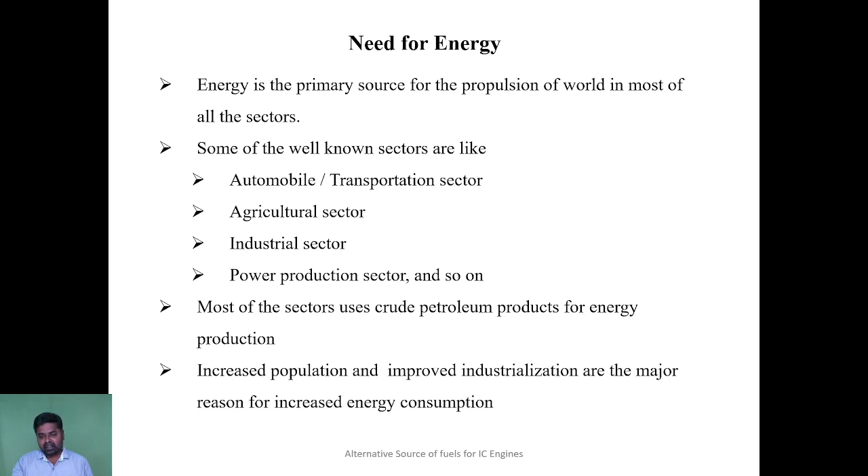So most of these sectors use crude petroleum products for the production of energy. And the major reason why the consumption of crude petroleum products keeps increasing is the increased population and improved industrialization, which are the major reasons for the increased energy consumption, and which cause the increased consumption of crude petroleum products also.

So the reason behind the dependence on crude petroleum products is purely based on the first law of thermodynamics. From the first law of thermodynamics, energy can neither be created nor destroyed, and one kind of energy can be converted into another kind of energy. So from this statement, we can easily understand that we cannot create energy, but one kind of energy can be converted into another kind.

It's similar for crude petroleum products also. That is, the chemical energy stored in the crude oil is converted into heat energy. From the heat energy, we can convert to our required kind of energy. In the same way, chemical or fuel energy obtained from crude oil is converted into heat energy and then into mechanical energy when this crude oil is used as a fuel in an IC engine.

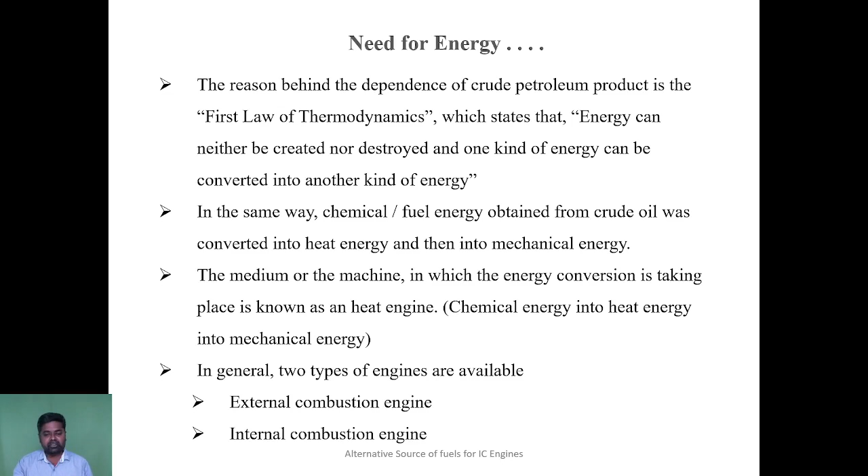The medium or the machine in which the energy conversion takes place is known as the heat engine. That is, the machine in which the chemical or fuel energy is converted into heat energy is known as the heat engine. In general, there are two types of engines available. The first one is the external combustion engine, and the second one is the internal combustion engine. So what is the difference between these two types of engines?

In external combustion engines, the best practical example is the steam engine that was used in locomotive trains in olden days. That is, the combustion takes place outside the combustion chamber, or otherwise the working fluid is contained internally and is heated by combustion in an external source through the engine wall or the heat exchanger. So these kinds of engines are nothing but external combustion engines.

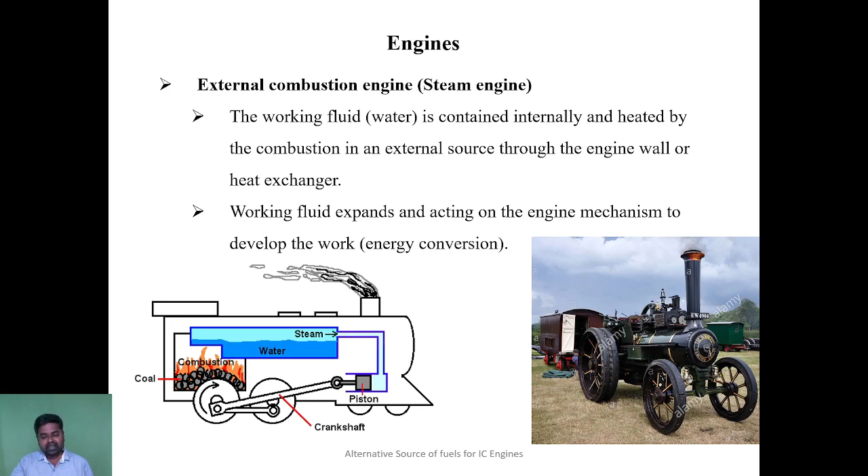The working fluid expands and acts on the engine mechanism to develop work, or otherwise the energy conversion process takes place. This is the schematic drawing of how the external combustion engine works, and this is the practical engine we used in previous history. Nowadays these external combustion engines have become obsolete. The reason these engines are not in use is the complex nature of their construction, and this was simplified by means of the internal combustion engine, or simply the IC engine.

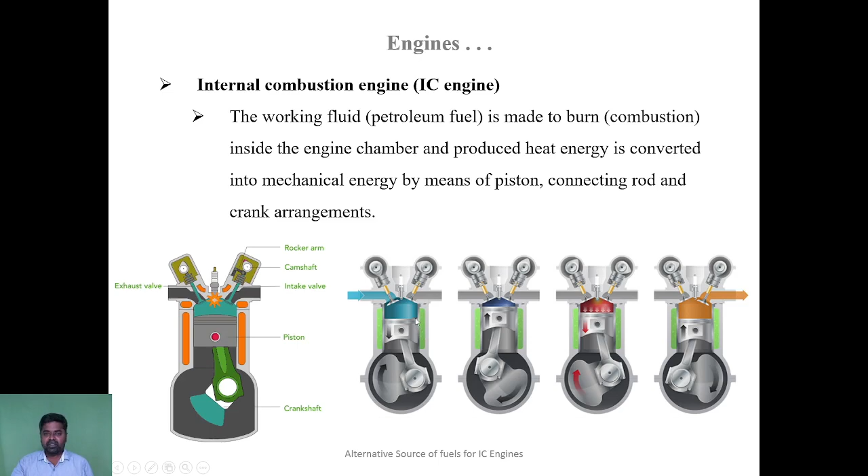In the IC engine, or the internal combustion engine, the working fluid is made to burn inside the combustion chamber or the engine chamber, which produces heat energy that is converted into mechanical energy by means of mechanical components connected to the engine arrangement. That is, in IC engines, the chemical energy of the fuel is converted into heat energy, and this heat energy is converted into mechanical energy by arrangements like a piston, connecting rod, crankshaft, and so on. So this is the major difference between the IC engine and the external heat engine.

In general, the development of the IC engine started from the 19th century onwards, and research is still going on. The IC engine is potentially far more efficient than the external combustion engine and produces more power output. In addition, there are some other reasons why we moved from the external combustion engine to the internal combustion engine, like the industrial revolution, flexibility of the engine, availability of fossil fuel, simple construction, quieter and cheaper operation, higher power to weight ratio, and so on.

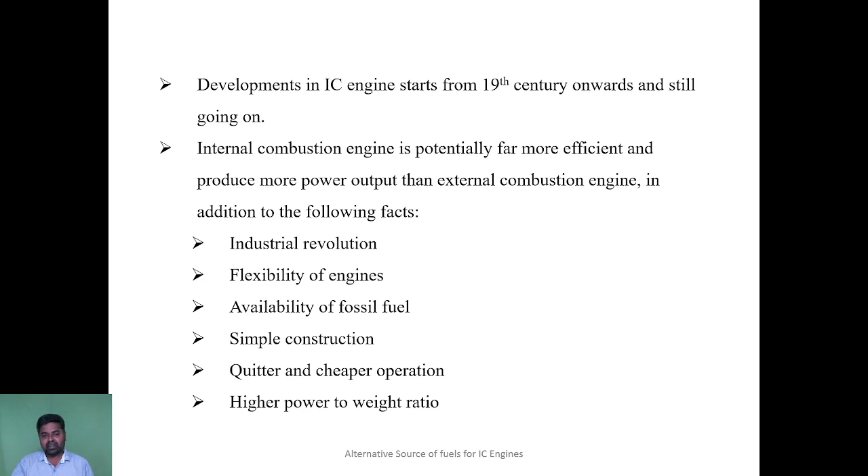There are many more reasons why we shifted from the external combustion engine to the internal combustion engine. During 1832 to 1891, Nicolaus Otto was the first person who developed the Otto cycle, which uses petrol as fuel to produce the energy source for the IC engine. Later, Rudolf Diesel, the inventor of the diesel engine, introduced the diesel cycle during the period of 1858 to 1913.

Both petrol and diesel fuels are refined from crude oil by means of the fractional distillation process. Crude oil is the major source for the production of petrol and diesel fuel through fractional distillation. In general, crude oil is a dark and sticky liquid, which is a mixture of different chemicals, or hydrocarbons.

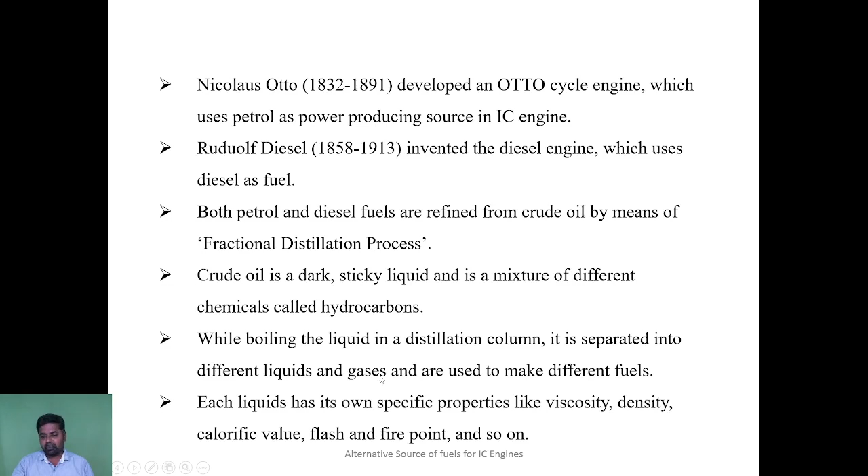While boiling the crude oil, the liquid in the distillation column is separated into different liquids and gases, which are used to make different fuels based on their physical and chemical properties. Each liquid has its own specific properties like viscosity, density, calorific value, flash and fire point, and some other properties.

Worldwide consumption of crude oil goes on increasing day by day due to increased population and increased industries. On the other hand, the availability of crude oil keeps vanishing. This is mainly due to the increased consumption of crude oil and its byproducts, which leads to a massive gap between production and consumption. As consumption increases, both production and processing cost of crude oil also increases, which causes fluctuation in fuel cost.

In order to overcome the scarcity and fluctuation of fuel cost, it is mandatory to find a suitable alternative source of fuel for internal combustion engines. This is not the only reason we are moving toward alternative fuel sources; we also have drawbacks like pollution problems. The combustion products emitted from the combustion chamber increase global polluting gases, which is also a major reason we are looking for alternatives to conventional IC engines.

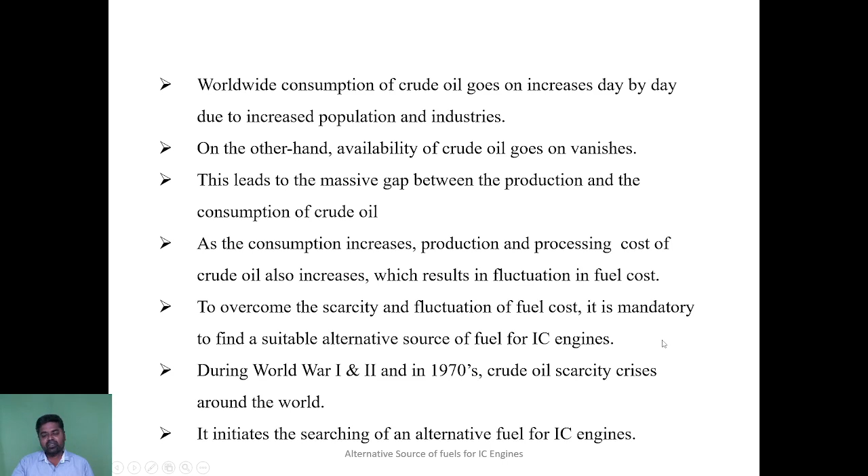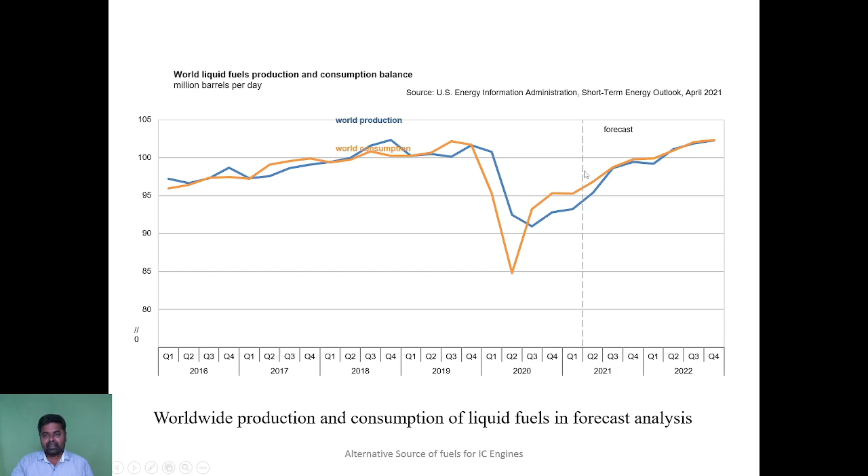Apart from the scarcity of fuel and fluctuation of fuel cost, hydrocarbon particles emitted during the combustion of fuel lead to environmental problems like global warming, depletion of the ozone layer, formation of smoke, acid rain, etc. These points I gave a small introduction on in the previous slide.

Stringent emission norms were implemented throughout the world to reduce the polluting gases emitted during the combustion of petrol and diesel fuels. European countries assigned the norms as Euro norms 1, 2, 3, and so on, year by year. Since 2014, Euro 6 norms were implemented in European countries with stringent emission standards.

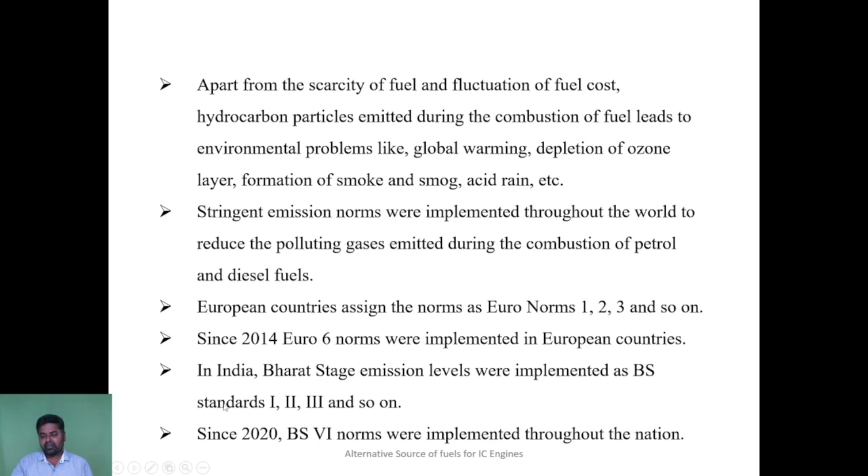In India, we have the emission norm called BS, that is the Bharat Stage Emission Level, implemented as BS standards 1, 2, 3, and so on. Since 2020, BS 6 norms were implemented throughout the nation in order to avoid pollution problems.

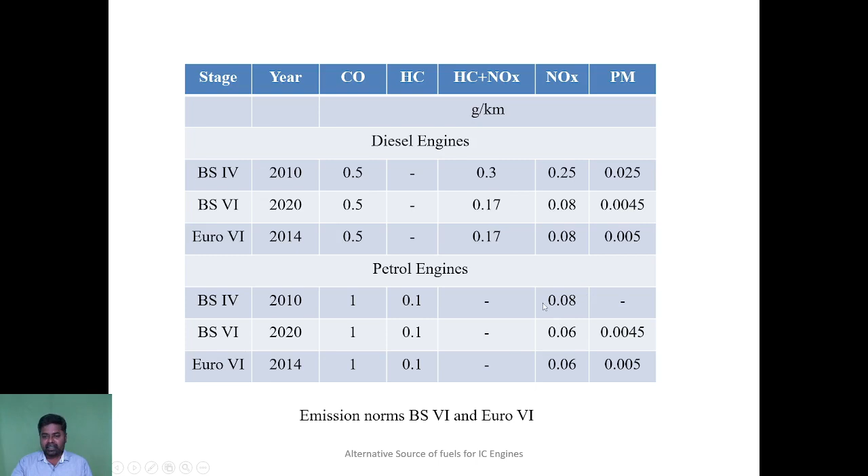These are some of the constituents and the quantity that is to be present in the exhaust gases for both petrol and diesel engines. The CO particle is to be present in the range of 0.5 gram per kilometer under BS4 norms, whereas in BS6 norms, the CO level is the same. On the other hand, the NOx level is to be reduced in BS6. This is for the diesel engine, and for the petrol engine, the same NOx value is 0.08 for BS4, and for BS6 it is 0.06 gram per kilometer. So this is how the government is making pollutant norms more stringent.

Next, we are going to see what are the alternative sources for fossil fuel. In order to overcome the scarcity and depletion of crude petroleum fuel, emission levels, and fluctuation in fuel cost, it is mandatory to find a suitable alternative source of fuels for IC engines.

Different alternative sources were available in both renewable and non-renewable forms.

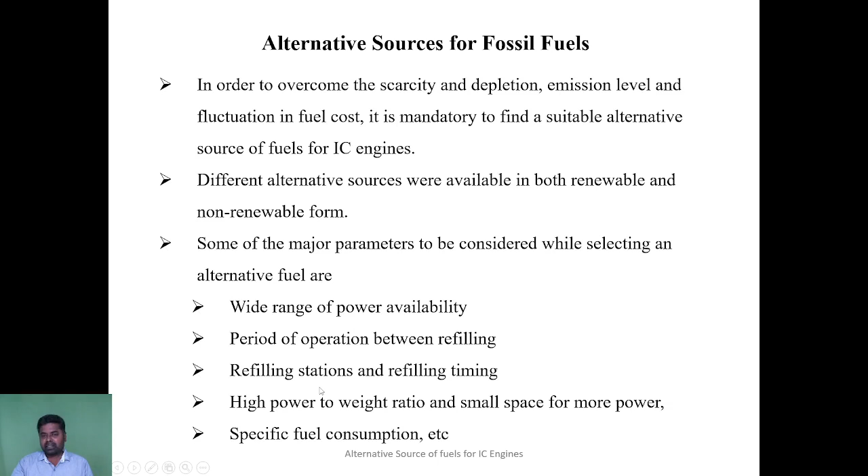Some of the major parameters to be considered while selecting an alternative fuel are: wide range of power availability, period of operation between refilling and refilling timing, high power to weight ratio and small space for more power, specific fuel consumption, and so on. These are some of the parameters we have to consider while selecting an alternative fuel to be used in or replaced in the IC engine.

Different alternative fuels have their own merits and demerits. Some of the alternative fuels that can replace the IC engine are LPG, CNG, alcohol, biofuels. These are types of fuels which can be used in the existing IC engine without replacing it, and some other vehicles that can be used with the replacement of the existing IC engine, where we have to remove the engine components and use a new base platform.

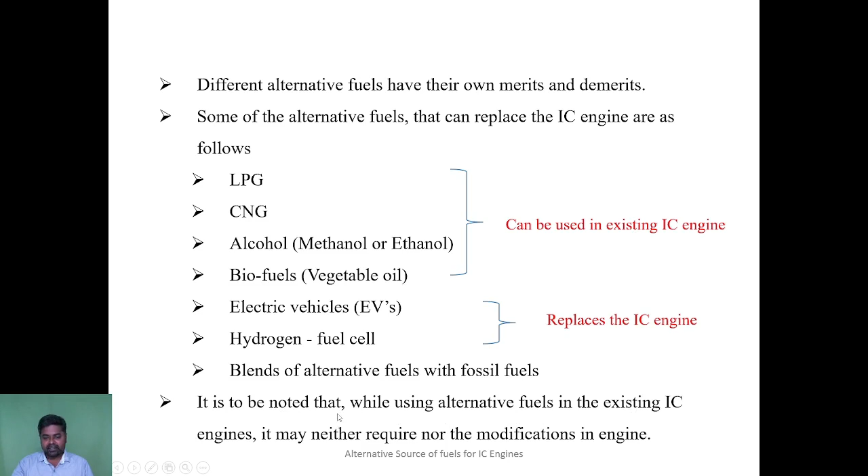Some of these sources are electric vehicles, hydrogen fuel cell, and blends of fuel. These two categories are to replace the existing IC engine, and the last one is the blend of alternative fuel with fossil fuel, which can be used in the existing IC engine with or without any modification. It is to be noted that using alternative fuels in existing IC engines may or may not require modifications.

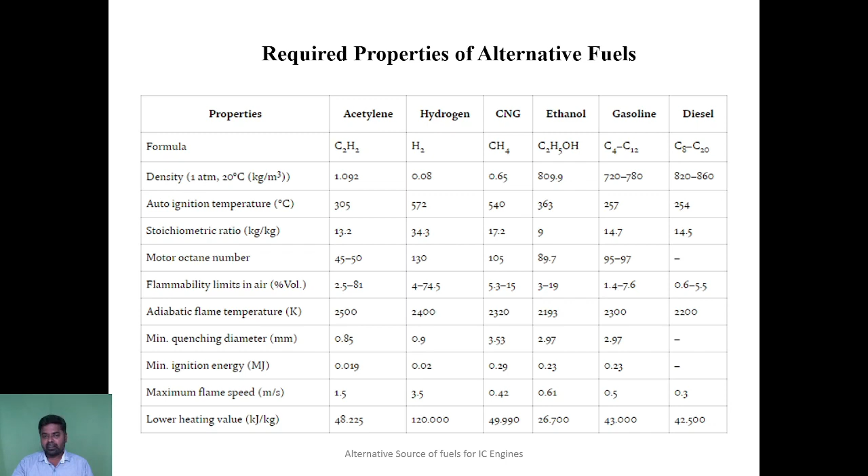Based on these parameters only, we can identify whether a kind of alternative source can be used as a fuel in either a petrol or a diesel engine. In the forthcoming slides, we are going to discuss some of the possible alternative sources.

The first one is LPG, which is nothing but liquefied petroleum gas. It is a byproduct of crude oil during the refining process, that is the fractional distillation process. It can be used as an alternative fuel for petrol engines, mainly due to the similar properties of LPG and petrol.

The major difference is that LPG is in the gaseous form, whereas petrol is in the liquid form. This is the only difference.

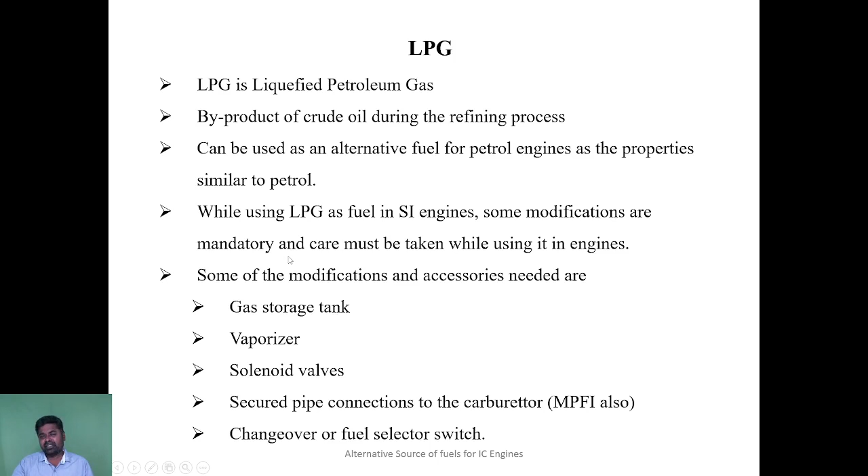While using LPG as fuel in SI engines, some modifications are mandatory and care must be taken. Some of the modifications and accessories needed are a gas storage tank, a vaporizer, solenoid valves, secured pipe connections to the carburetor, and a changeover or fuel selector switch. These are the major modifications needed in an engine while using LPG as fuel in SI engines, that is spark ignition engines or petrol engines.

The merits or advantages of using LPG as fuel in an SI engine are: no need for major modifications in the engine, reduced cost per kilometer, similar functioning to petrol fuel. It burns completely, is eco-friendly, and reduces the polluting emission level.

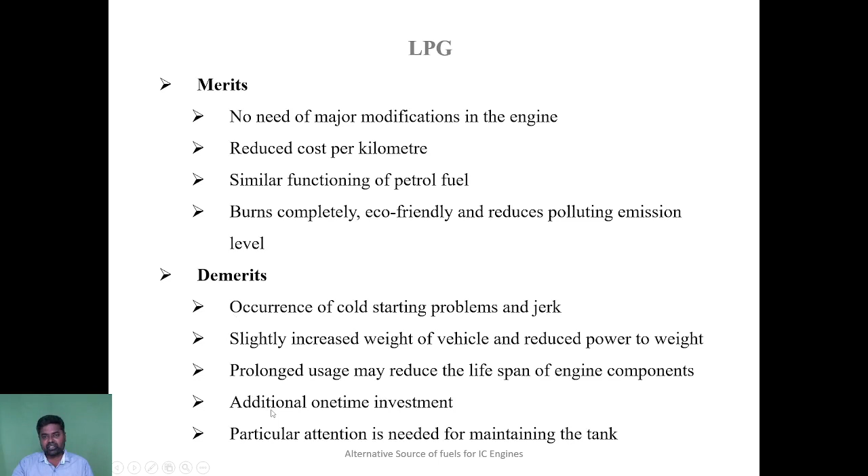It has some demerits also. Some of the limitations are occurrence of cold starting problems and some jerk, slightly increased weight of the vehicle and reduced power to weight ratio. Prolonged usage may reduce the lifespan of engine components. There is additional one-time investment, and particular attention is needed for maintaining the LPG tank. These are some of the drawbacks of using LPG as fuel in a petrol engine.

The next one we are going to see is CNG, that is compressed natural gas. It is nothing but methane gas in compressed form, stored in cylinders. This is also a byproduct of crude oil during the refining process, and can also be collected from animal waste. That is, methane gas can be used as fuel.

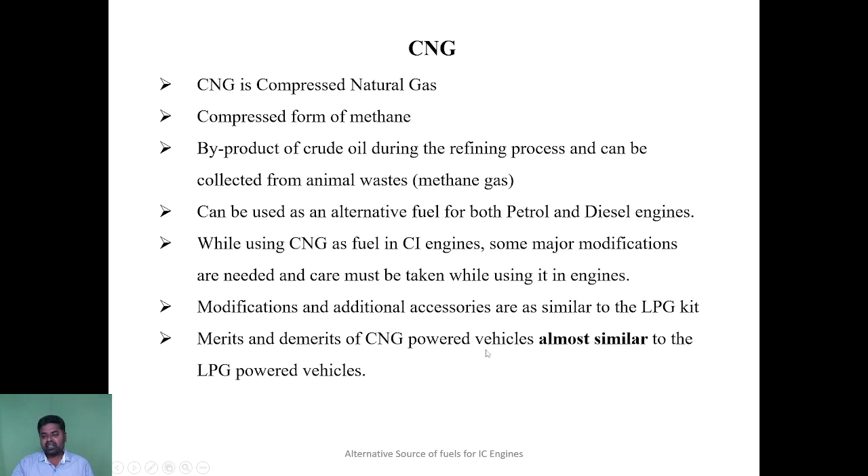CNG can be used as an alternative fuel for both petrol and diesel engines. While using CNG as fuel in engines, some major modifications are needed, and care must be taken. Modifications and additional accessories are similar to that of an LPG kit, and the merits and demerits of CNG powered vehicles are almost similar to LPG powered vehicles.

The next alternative source is alcohol. Either methanol or ethanol can be used as an alternative fuel to existing IC engine fuels, petrol or diesel. This alcohol is mainly extracted from different crop industries and is a byproduct of the fermentation process.

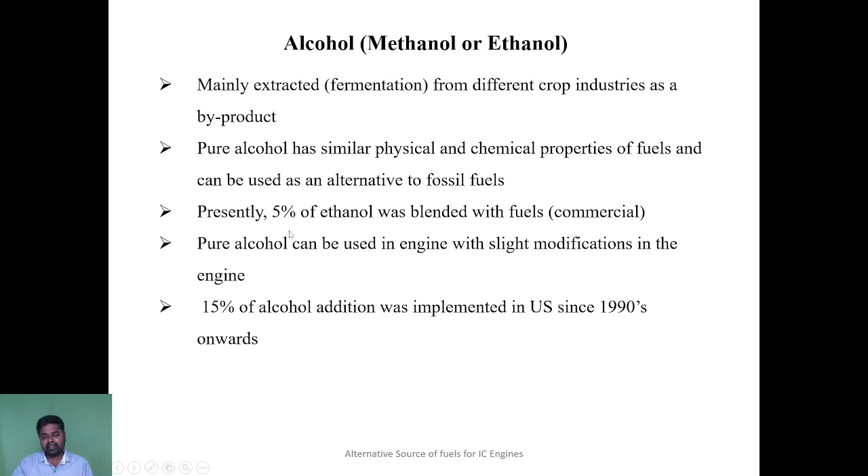Pure alcohol has similar physical and chemical properties to fuel and can be used as an alternative to fossil fuel. Presently, 5% ethanol is blended with commercial fuels. Pure alcohol can be used in the engine with slight modifications. 15% alcohol addition was implemented in the US since 1990 onwards. Presently in India, we are having 5% ethanol addition in petrol fuel as a testing method.

We also have some merits and demerits for alcohol. Some merits are: no need of major modifications in the engine while using it in a blend ratio, that is, if you use some percentage mix, there's no need to modify the existing engine. It burns completely, is eco-friendly, and reduces the polluting emission level. It delivers higher power than fossil fuel. It can be blended with fuel in any proportion. It reduces cold starting problems, which is a major issue in alternative fuels.

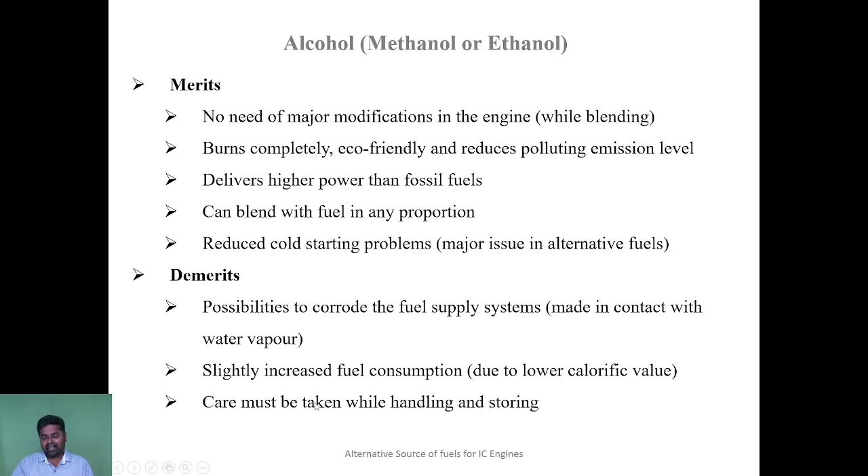Some demerits or limitations are: the possibility to corrode the fuel supply system when in contact with water vapor, and slightly increased fuel consumption due to lower calorific value. Care must be taken while handling and storing alcohol.

Next, we are going to see biofuel or vegetable oil. It is nothing but oil derived from biomass sources like plants, seeds, and so on. It can be used in the existing IC engine without modifications and can be blended with diesel fuel. Some biofuels can be used in engines as is, or the straight vegetable oil can be used as fuel in existing IC engines. While using straight vegetable oil, we may need some modification in the existing IC engine.

Both edible and non-edible oils can be used as alternative fuel. Some vegetable oils usable as alternative fuel are sunflower oil, castor oil, soybean oil, and corn oil, which come under the category of edible oil. In countries like India, or developing countries generally, the government is not insisting on using edible oil as an alternative source. Instead, developing countries like India are encouraging the usage of non-edible oil as an alternative to existing IC engine fuel. Some non-edible oils are neem oil, jatropha oil, pungamia oil, rice bran oil, and so on.

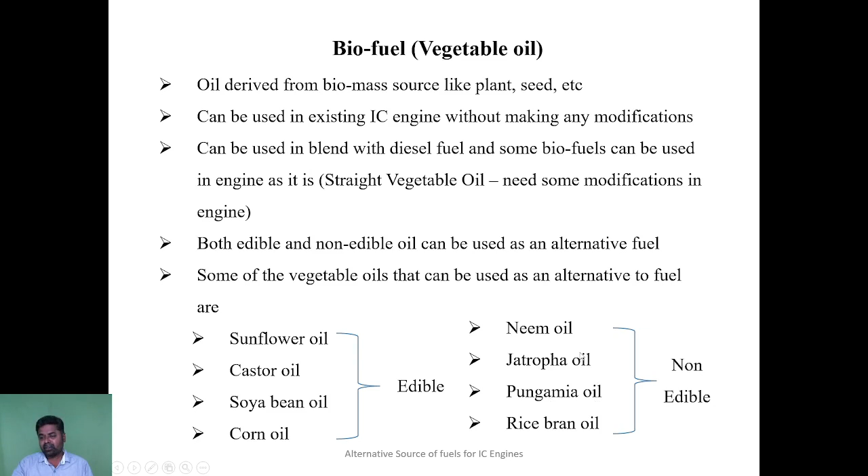This biofuel also has many merits and a limited number of limitations. Most advantages are: it is a biodegradable material, non-toxic, and renewable. It has similar physical and chemical properties to diesel fuel, complete combustion and improved emission characteristics, and is easy to handle, store, and transport. It has low sulfur content. Engine component life is increased if we use biofuel as fuel. It has better lubricating nature.

Very few limitations or demerits of biofuel are: a conversion process is needed, that is, we have to convert the biomass into biofuel by some process like trans-esterification, direct blending, microemulsion, or pyrolysis. It has a low cetane number, and there is a possibility for the formation of gumming. It reacts with rubber material, so the rubber material gets eroded while using biofuel in an existing IC engine.

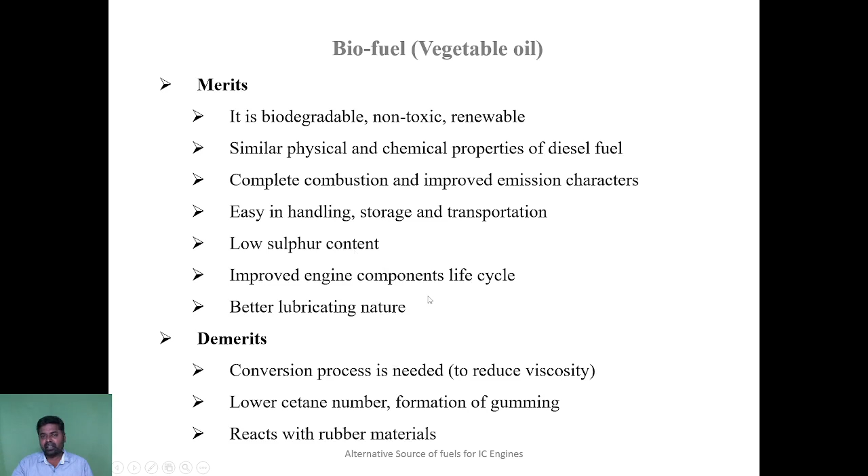The next one is the electric vehicle. As already discussed, it is a kind of alternative source which replaces the entire IC engine platform and uses a new platform. Electric energy is used to run the motor which propels the vehicle, and it can be used in addition with the IC engine, that is, a hybrid vehicle, or it can be used as a pure electric vehicle, EV. A regenerative braking system can be used to charge the battery.

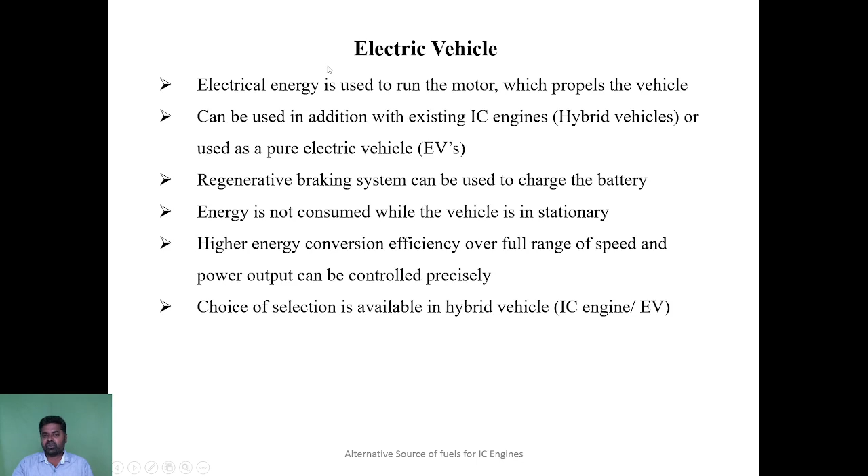Energy is not consumed while the vehicle is in stationary condition. There is higher energy conversion efficiency, and overall, the full range of speed and power output can be controlled precisely. A choice of selection is available in hybrid electric vehicles, and one of the best examples is Toyota's Prius model. Nowadays, more new kinds of electric vehicles or electric two-wheelers are available in the market too. It has some advantages and disadvantages, or merits and demerits. There is no tailpipe emission in electric vehicles.

It has the higher initial torque, reduced cost of recharge, and increased stabilization on the road, which is mainly due to the higher weight. Some of the limitations are reduced operating range, refilling duration, availability of refilling stations, higher weight-to-power ratio, higher initial investment and maintenance cost. So these are some of the limitations of electric vehicles.

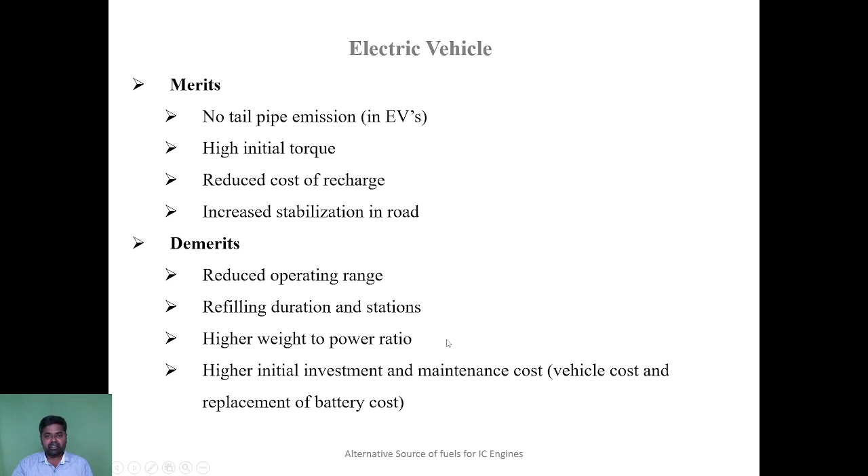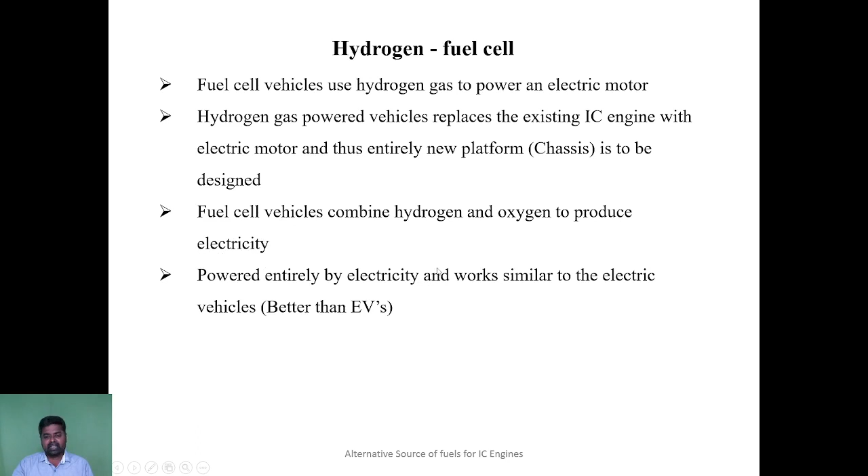The next one is hydrogen or fuel cell. Fuel cell vehicles use hydrogen gas to power the electric motor. Hydrogen gas powered vehicles replace the existing engine with the electric motor, and thus an entirely new platform is to be designed when using a hydrogen fuel cell vehicle. Fuel cell vehicles combine hydrogen and oxygen to produce electricity, are powered entirely by electricity, and work similar to electric vehicles, and are better than electric vehicles also.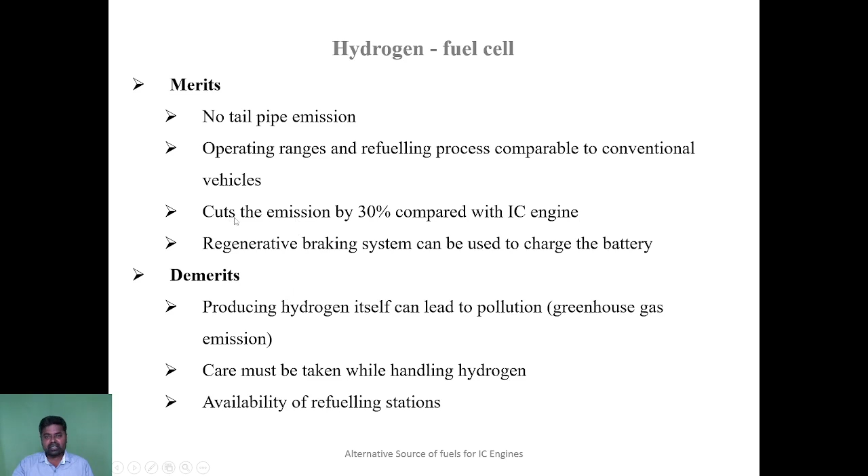It has some advantages and limitations. It also has no tailpipe emissions, and operating range and refuelling process are comparable to conventional vehicles. It cuts emissions by 30% compared with the IC engine. A regenerative braking system can be used to charge the battery. Some of the limitations are that producing hydrogen itself can lead to air pollution, which forms greenhouse gas emissions. Care must be taken while handling hydrogen. Availability of refueling stations is another limitation of the hydrogen fuel cell vehicle.

Now we are going to see what the methods to convert the alternative fuel are. As we discussed in the previous slides, some fuels can be directly used as a blend with both petrol and diesel fuel, and some fuels like LPG, CNG and alcohol can be directly used in the IC engine. On the other hand, for electric vehicles and hydrogen fuel cell vehicles, there is a need to replace the existing IC engine with the electric motor.

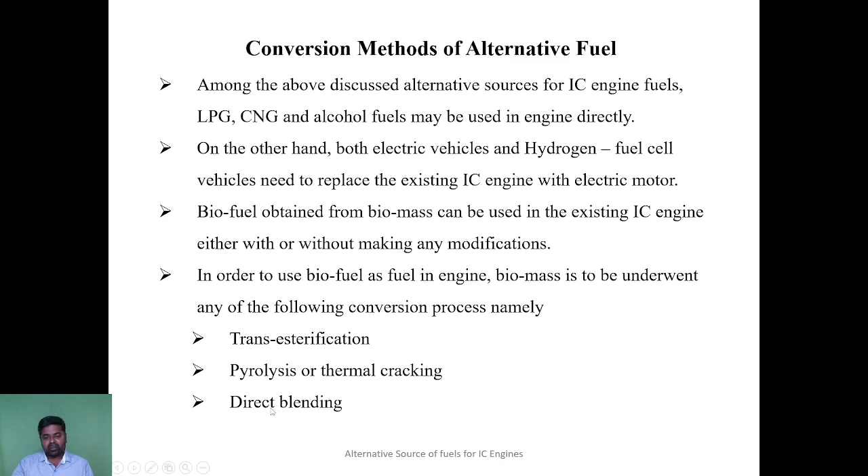Biofuel obtained from biomass can be used in existing IC engines either with or without making any modifications. In order to use biofuel in an IC engine, biomass has to undergo one of the following conversion processes: trans-esterification, pyrolysis or thermal cracking, direct blending and so on.

First we are going to see the trans-esterification process. It is a type of chemical conversion process in which vegetable oil with longer hydrocarbon chains is broken into smaller ones. Vegetable oil is made to react with an alcohol in the presence of a catalyst, and the product of this reaction is a kind of ester with smaller hydrocarbon chains and glycerol. The glycerol is separated from this mixture, and the smaller hydrocarbon chains can be used in a blend with diesel fuel. Catalyst and heating can be used to improve the rate of reaction. Conversion of triglycerides into ester and glycerol is the trans-esterification process.

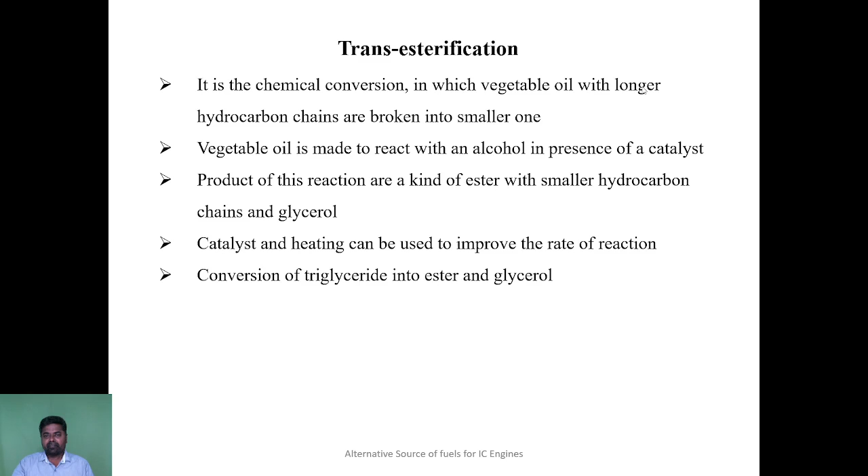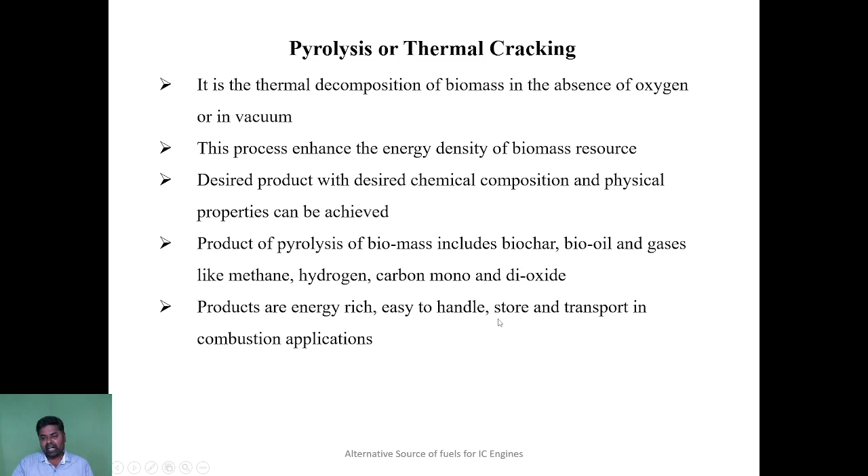The next one is the pyrolysis or thermal cracking process. It is a type of thermal decomposition of biomass in the absence of oxygen or in vacuum conditions. This process enhances the energy density of biomass resources. A desired product with desired chemical composition and physical properties can be achieved. Products of pyrolysis of biomass include biochar, bio-oil and gases like methane, hydrocarbons, hydrogen, carbon monoxide and carbon dioxide. The products of this pyrolysis process have higher energy and are easy to handle, store and transport in combustion applications.

Regarding testing methods of alternative fuels, the suitability of an alternative fuel for use in an IC engine can be examined by conducting performance and emission characteristics tests in an engine. Different blends may be prepared and fueled in the engine to examine the performance and emission characteristics. Obtained results may be compared with the results of the base fuel, that is diesel fuel. From the comparative reports, the best suited fuel blends can be selected for further studies about that particular alternative fuel.

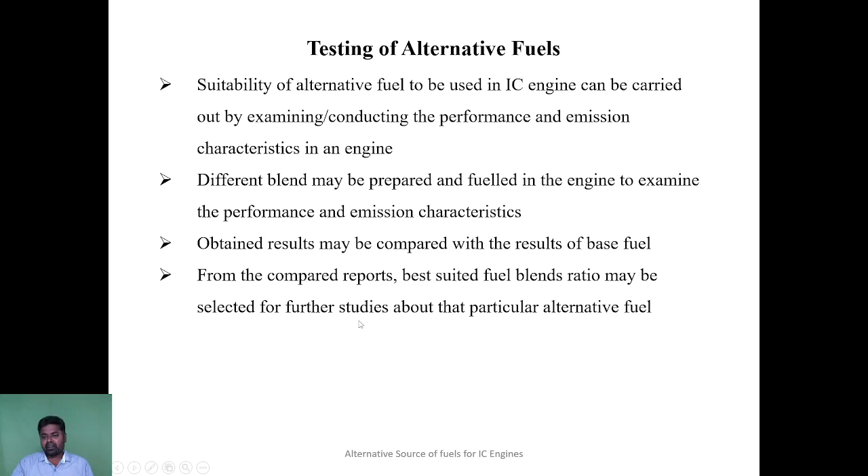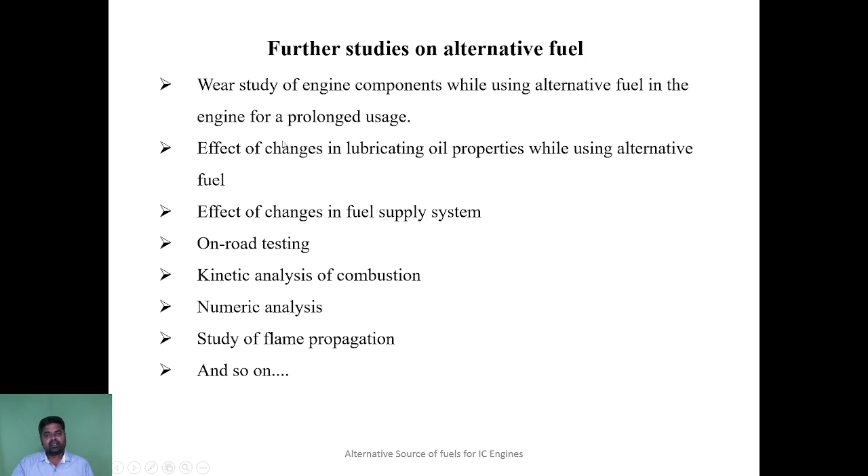These are some of the possible scopes to be carried out in alternative fuels: wear study of engine components while using alternative fuel for prolonged usage, effect of changes in lubricating oil properties, effect of changes in the fuel supply system, on-road testing, kinetic analysis of combustion, numerical analysis, study of flame propagation, and so on. These are some of the future studies that can be carried out in alternative fuels. With this, we wind up the session, thank you.